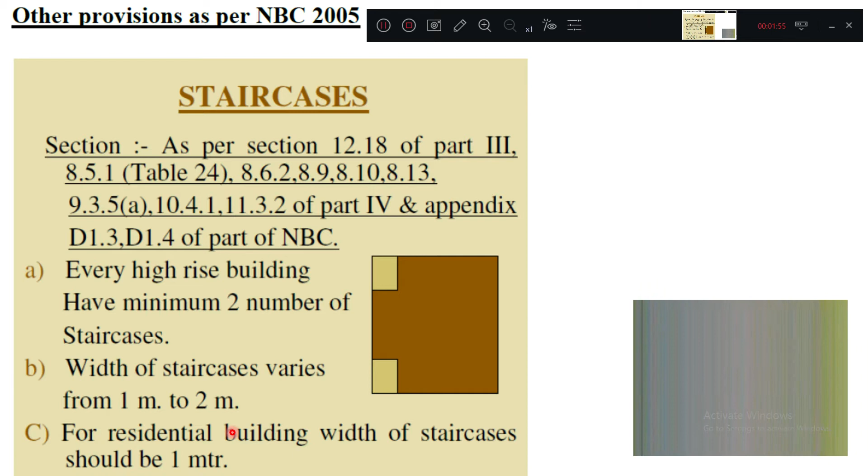Now, for lifts, we have taken the clause from part 3, part 4 of NBC. So we can see minimum one lift capable of carrying minimum 8 persons weighing 545 kg shall be provided for every high-rise building. This is generally not adopted during fire. Always remember, during a fire accident nobody should use the lift, everyone should use a staircase, open staircase, but still they have given it like that.

Landing doors of lifts shall open to the ventilated lobby. What do you mean by this? Wherever the doors of a lift open, they should open to a ventilated lobby, and shall have a fire resistance of 1 hour. For 1 hour means once fire catches, till 1 hour the things should not collapse. Till 1 hour the doors should withstand the heat and temperature. That is called 1 hour capacity, 2 hour capacity. These are called fire resistance of materials in hours. So for this, minimum 1 hour.

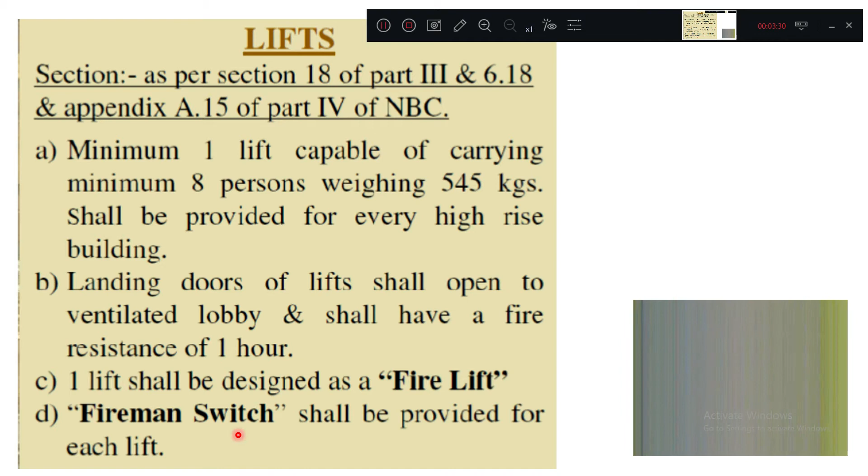And one lift shall be designed as a fire lift. So one separate lift should be there for firemen to go up and down to extinguish the fire. They also provide a fireman switch for each lift. Lift shall not be used as a means of evacuation, so lift should not be used for evacuation purpose. Collapsible gates shall not be provided. Means automatic sliding gates should be there, but collapsible gates should not be provided.

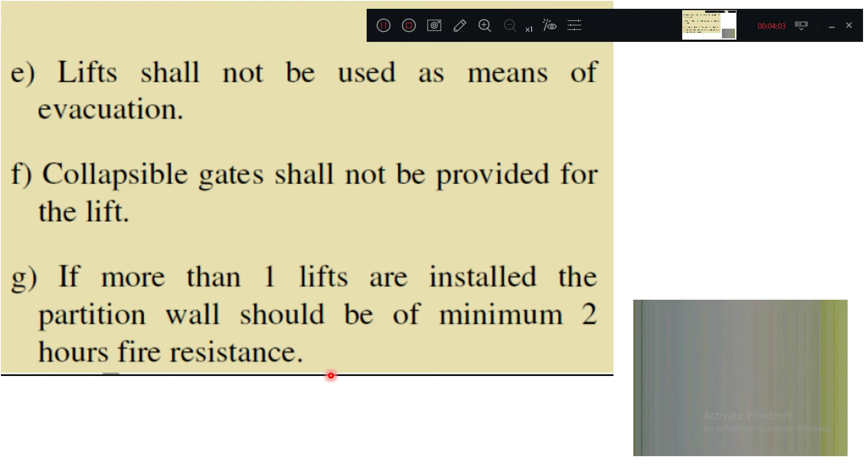If more than one lift is installed, the partition wall should have minimum 2 hours of fire resistance. That partition wall is coming now. So that's fire resistance capacity, called fire rating, which should be minimum 2 hours.

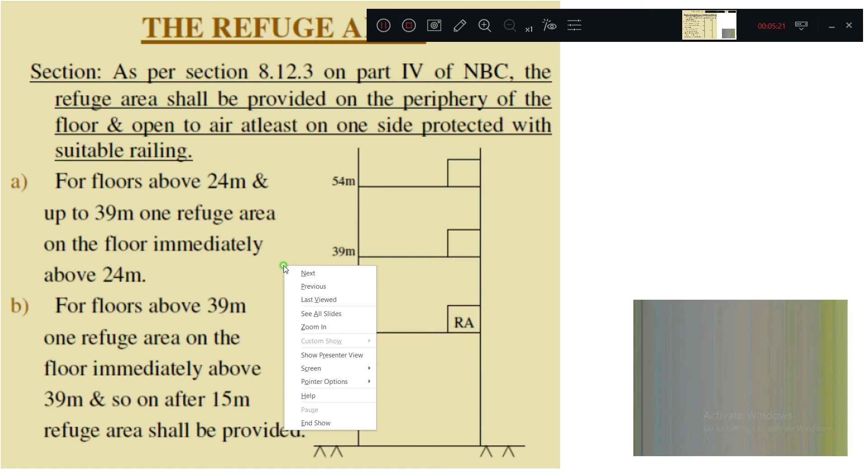Service ducts. What are these service ducts? As per the appendix D 1.9 part IV of NBC, all service ducts are nothing but closed enclosures. If provided, they should be enclosed by walls of at least 2 hour fire resistance. Means what? Wherever walls are provided for these service ducts, fire resistance should be 2 hours minimum, and they should be sealed at every alternate floor with non-combustible material having again 2 hours fire resistance. Again, non-combustible material has to be used.

The sealing at floor level is to prevent travel of smoke and fire to the upper floors through ducts. Ducts are nothing but a pipe kind of structure, generally used for ventilation in big buildings. So first, ducts should be covered with non-combustible material. Second, they should be sealed such that smoke and fire from other parts do not get inside the service duct and move to the next level. To control that, we provide service ducts with non-combustible material, 2 hours of fire resistance, and proper sealing at each floor level.

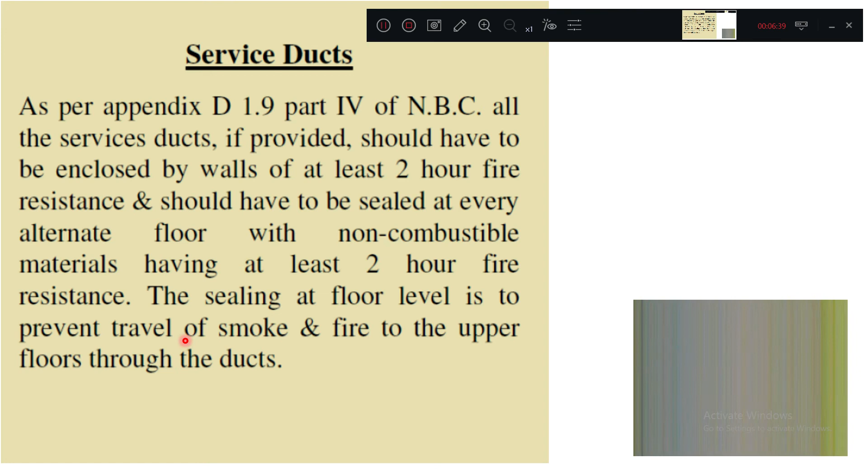Now, wet riser cum downcomer system. What do you mean by this? These are pipeline arrangements which hold water. That is why we use wet: wet means it is completely filled with water. Riser means the water is coming from the bottom and rising to the roof level, so we call it a riser. Sometimes it is called a downcomer. Means what? The water tank is already there at the top, a pipeline is drawn from there, and water moves from top to bottom. So that is why we call it a downcomer.

Otherwise, riser means the water tank is at the bottom on ground level, and a pumping arrangement is made so that water goes to the top. That is why we call it wet riser or downcomer. If completely filled with water, it's called wet. If it is not having water, it's called a dry riser. Dry risers are generally used in cold countries to avoid freezing of water into ice so that pipes do not burst. Whenever there is a fire, we use it with water; otherwise it is kept dry.

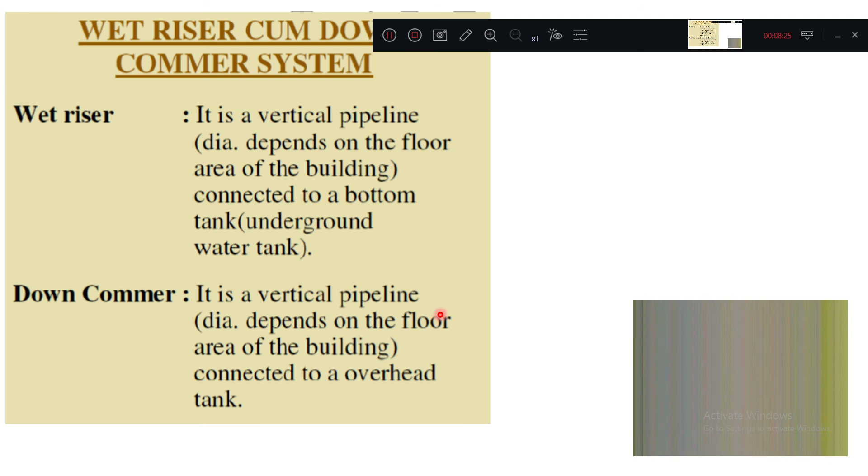Now, this is an external wall. Here the pumping arrangement can be made. A small drain valve is provided, two inlets are there, and a steel cabinet is there. From here there may be an underground tank, and from there a pumping arrangement is made so that water goes to the top. That is why we call it a riser, and if completely filled with water, a wet riser. On the top we have an air release valve, and at each floor level we have a landing valve from where the pipeline will be taken.

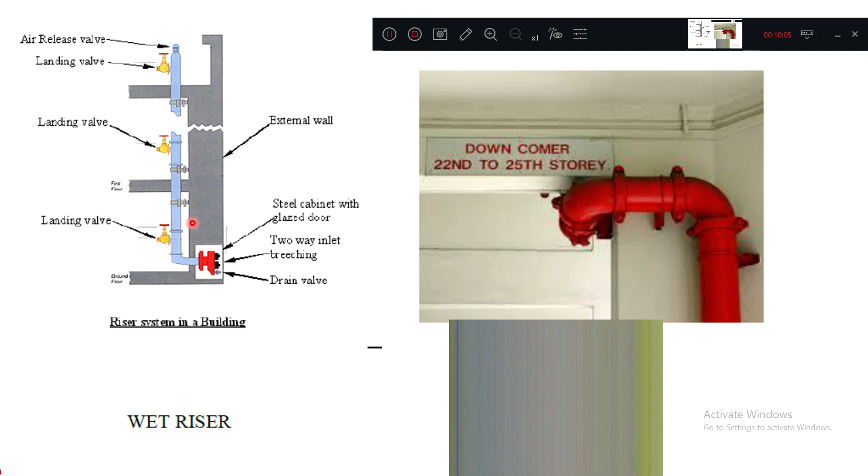Now, what is this? This is generally a downcomer. The full diagram is not shown; it is similar, but the only difference is there will be an overhead tank and pipes drawn from it. So that is the part of wet riser and downcomer. These are used for fire extinguishing operations in emergency cases. Here the fire equipment will be kept, to break the seal and have a hose. Everything is connected here.